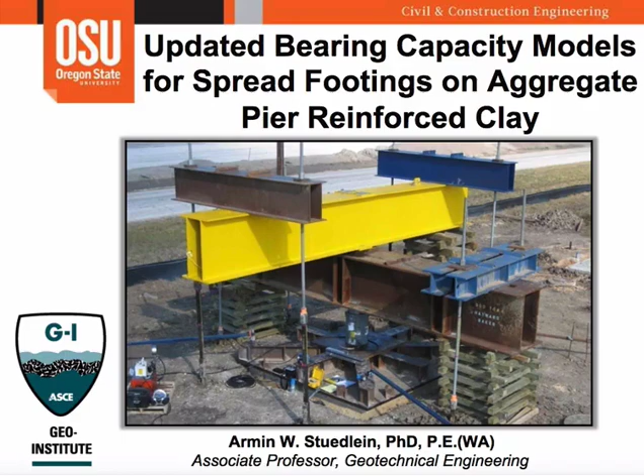Thank you, Sadiq. It looks like my slides have come up, so I'm going to go ahead and get started here. Just want to thank the technical committee for agreeing to host this presentation. Essentially, I'll provide a short introduction and background for the work, and then get into the main portion of the presentation to indicate the experimental basis for the models that we've proposed.

Then we'll take a step back into the theoretical considerations for bearing capacity of aggregate pier improved ground and discuss the accuracy of previous bearing capacity models, and then begin to step through the various models we've developed using the existing database and some new loading test data that we've developed since then.

So for those of you who might not be relatively familiar with aggregate piers or stone columns, I'll give a quick background. We're only going to talk about the action of these ground improvements in plastic soils. In my experience, for plastic soils, whether we use a stone column or aggregate pier or call it a granular pile, they all seem to behave the same way. They follow the same mechanics.

This ground improvement alternative usually provides a cost-effective alternative instead of full excavation and replacement, and in some cases, deep foundations. Furthermore, it can provide a sustainable alternative to other construction approaches in that it reduces the excavation material volume, the duration of excavation, reduced material quantities, and you can also take advantage of using recycled aggregates in their construction. There are several types of aggregate piers, essentially classified on how they're constructed.

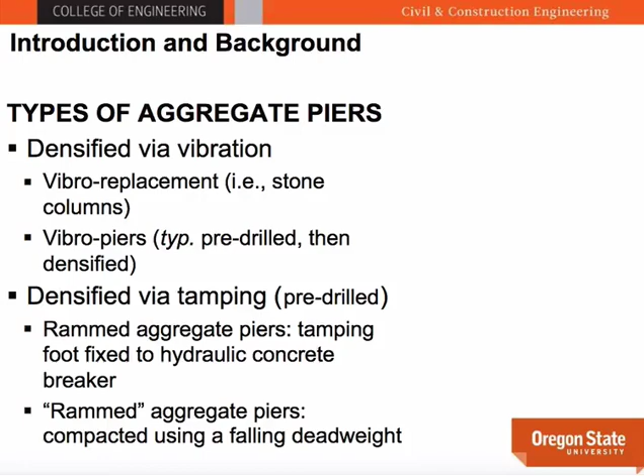I think the first kind of aggregate pier, or really a stone column, was produced starting in the 1930s in Germany, by vibro replacement. Here the vibrator is used with a tremie pipe in a bottom feed method to construct the stone column or aggregate pier. But we can also construct a vibro pier, the general term, where first a cavity is pre-drilled using soil augers, as shown in this photo. Then stone is placed from the top feed approach, and the material is then compacted via vibration.

Quite common and popular are aggregate piers that are densified via tamping. Here we've got essentially an excavator that has a hydraulic concrete breaker with a tamping foot, and the concrete breaker delivers short energy pulses to the tamping foot to compact the aggregate.

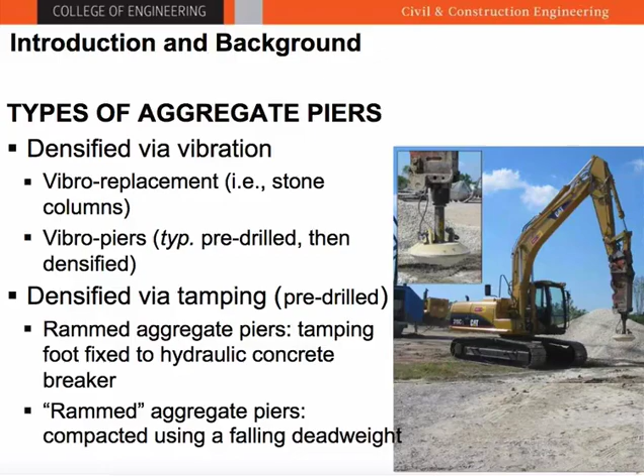Now, these are really not new types of construction. For example, the Taj Mahal was built in the 1700s, or even maybe the 1600s, using what we would call rammed aggregate piers, constructed using a free-falling dead weight, and that's still used in some parts of the world where labor is cheaper.

So if we think about how we can apply ground improvement of aggregate pier type to spread footings, there are essentially four major configurations here. I apologize, it looks like there's a plotting issue on my slide, but essentially you've got a single pier, given by caption A in the schematic, where the footing footprint and the stone column have the same diameter.

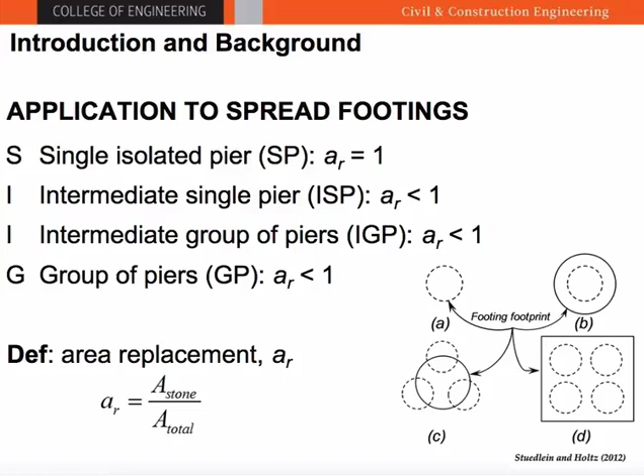In this situation, the area replacement ratio is 100%. Captions B and C show cases of intermediate groups of piers or single piers where the footing footprint may encapsulate all or part of the stone column as well as part of the surrounding soil. And then the more typical production condition is a group of piers where the footing footprint is much larger than the area of stone. Typically in production, you'll see area replacement ratios for static support ranging from maybe 15 to 40%, depending on the loading conditions.

So let me give you a quick background on the experimental basis for the bearing capacity models that we'll be talking about. This largely stemmed from my doctoral work at the University of Washington. Around 2006 or so, we performed an extensive literature review and found 47 loading tests reported in the literature of shallow foundations on aggregate piers in plastic soils. About a third of those were of good enough quality that we considered them for the development of bearing capacity models. But clearly 15 loading tests is not sufficient to evaluate the accuracy of existing models or develop new ones.

So we performed rather extensive full-scale loading tests of 20 full-scale footings. These included 12 single-element tests, or single-pier tests. Five tests were on groups of piers with a 9-foot by 9-foot square footing, and the remaining 3 tests were done on an unimproved subgrade using both the large and the small footings. At this test site, which was in Baytown, Texas, the subsurface conditions were your typical Beaumont clay, which is medium stiff in the near surface, grading to stiff as you go a bit deeper.

Our test site is shown on the figure here on the left, indicating the distribution of each individual loading test, as well as the explorations conducted to inform the model of the subsurface. Single-element tests were conducted with a 2-beam system with 3 reaction points to transfer the uplift loads to helical anchors. The larger footing loading tests were conducted using a 6-beam reaction set with 8 anchors to generate sufficient resistance to push the footings down.

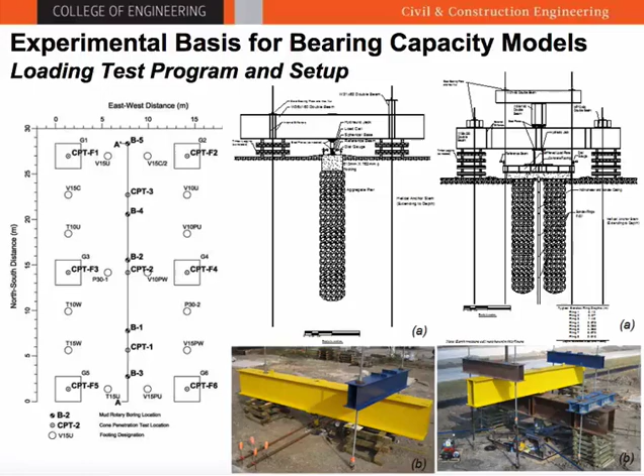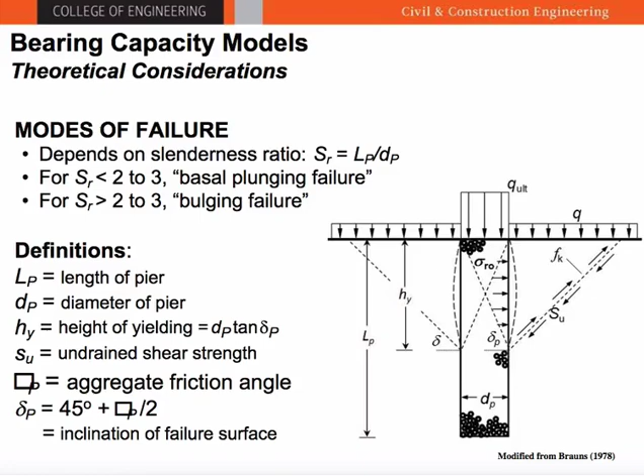Another approach, suggested by Mitchell in 1981, is to boil down the problem to a simpler empirical approach, which we call the simplified method, in which a single aggregate pier bearing capacity factor is multiplied by the undrained shear strength to develop the capacity.

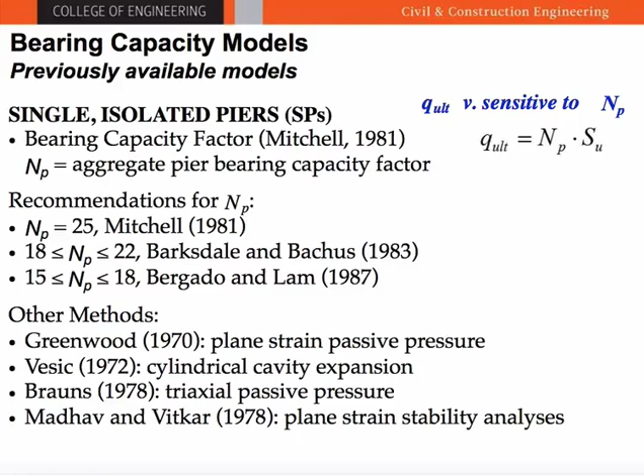Now, there are several other methods in the literature, we just don't have time to review those here.

With our load test database, which included 30 different high-quality load tests, we're able to evaluate the capacity of single isolated piers by comparing the bias, defined as the observed capacity divided by the predicted capacity, and then the variation in the bias, which we measure using the coefficient of variation, the standard deviation divided by the mean.

The table shows that the bias on average could vary greatly, from an underprediction of 250% with a variation of 30%, to an overprediction on the order of 50% with the Brauns method, which has a bias of 0.64 and also produces significant variability in accuracy.

The simplified method by Mitchell could achieve an average accurate bias of 1.01, meaning on average a perfect prediction, but you see that the COV is still quite large at about 25%. That just happens to be the value for our database, so there's not a lot of predictive power moving forward.

So we thought we could improve upon these models by using a semi-empirical adjustment of the theory. We back-calculated key bearing capacity factors for the cavity expansion model and the simplified model, and found that there's a significant influence of the undrained shear strength. That's really not a surprise, because the triaxial passive pressure in a plastic soil under undrained conditions is controlled by the undrained shear strength of that material.

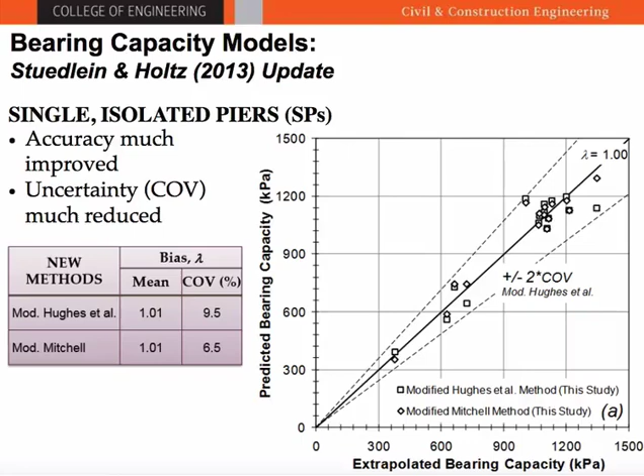If we compare the bearing capacity extrapolated from each of the loading tests to that predicted using these two new models, we're able to see that we're quite accurate on average, and we've reduced the coefficient of variation to under 10% across the board. At the time, we were pretty happy with these semi-empirical bearing capacity models.

So these are for single isolated piers. What about groups of piers or intermediate pier conditions? What we did is invoke the unit cell assumption, treating each aggregate pier below the footing as having some tributary area that controls its response.

It's quite common in terms of settlement analyses with aggregate piers to use this unit cell assumption, where we essentially factor the stress distributed to the pier by its area replacement ratio, and then we add in the stress transfer to the soil by 1 minus the area replacement ratio.

And so we adapted this approach for settlement calculations to capacity, where we would factor each calculated capacity, for example, the capacity of a single pier, by its area replacement ratio, and then add in the factored capacity of the soil if there hadn't been an aggregate pier in place. This simplified approach was found to produce an improvement over the other methods that were available for groups of piers.

Now, note, I'm not discussing the other bearing capacity models for groups of piers, but we did compute their accuracy statistics, and the bias was found to be highly variable with a COV of about 40%. That's really not good. If we discount the intermediate single piers, the bias is pretty close to 1 and a COV of about 13 to 15%. Including the intermediate single pier geometry, the bias is a little bit high with a general underprediction of about 10% and a COV of about 30%.

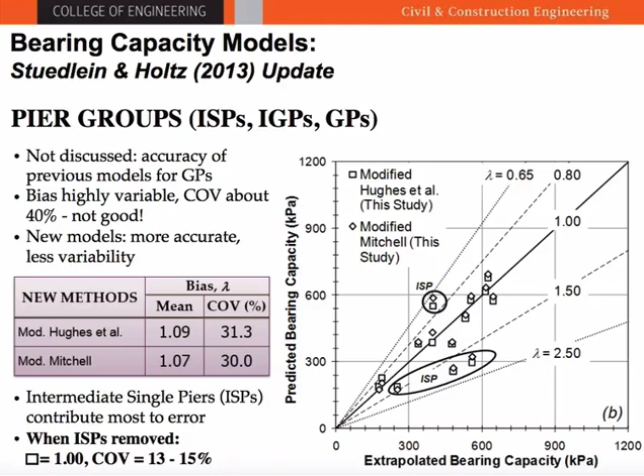But since this was published in 2013, we've recently completed a new load test program, and with our 8 new load tests, we're able to further update our bearing capacity models. In the previous models, we really didn't account for slenderness ratio directly, and we only indirectly accounted for confinement of a single pier below a footing in a group pier configuration. And this led to the poor accuracy for some of the pier cases, like the intermediate single piers, the intermediate groups of piers, and the group of piers. So we thought we would take a new look at the bearing capacity models, to be informed by the new data and see if we can account for some of these known variables a little bit better.

If we look at this little schematic in the upper right-hand side, we now want to account for the confinement produced by the soil surrounding the pier. We're not necessarily talking about the stress per se directly, but rather the volume of soil that is confined below the footing, and account for the extent of confined soil to better improve the capacity. So we back calculated the capacity of a given pier below the footing as it lies within the group, quite a bit different from the single pier capacity discussed earlier, and we can back calculate it using the same general approach that was proposed in 2013.

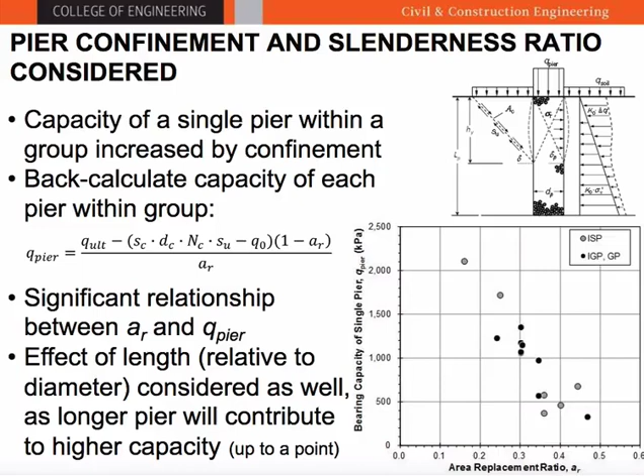And what we see is that there's a significant relationship between the capacity of a single pier in any group as a function of the area replacement ratio. You can see that the capacity of that pier really depends on the volume of confined soil surrounding it, and that explains the negative relationship between the capacity of that single pier and the area replacement ratio. There is some scatter here, and that has to do with the effect of slenderness ratio, and so we'll get into that shortly.

So we propose new models which are not being shown nicely on my slides. I hope they're being shown nicely on your slides. That includes the confinement effect. Each of these new models has two components. One is the capacity of a single pier, again factored by the area replacement ratio, and then the capacity of the unimproved soil, which is also factored by 1 minus the area replacement ratio.

The new item here is that, number one, we've recalibrated the N sub P and the K sub P factors, which are the bearing capacity factor and cylindrical cavity expansion factor, but we've also added this confinement factor, which is a function of the area replacement ratio. The newer capacity factors now include both undrained shear strength and slenderness in their general terms. So if we go to the next slide, we can show the actual formulations for these new factors.

If these slides are not available after the talk, you can always email me for a copy of these slides. But here we can see the new formulations for N sub P, accounting for slenderness, and then here's the back-calculated empirical confinement effect factor. Regardless of what model you use, either the simplified model or the cavity expansion model, the confinement factor is the same because the effect of confinement is the same on the aggregate pier. So we want it to be philosophically consistent.

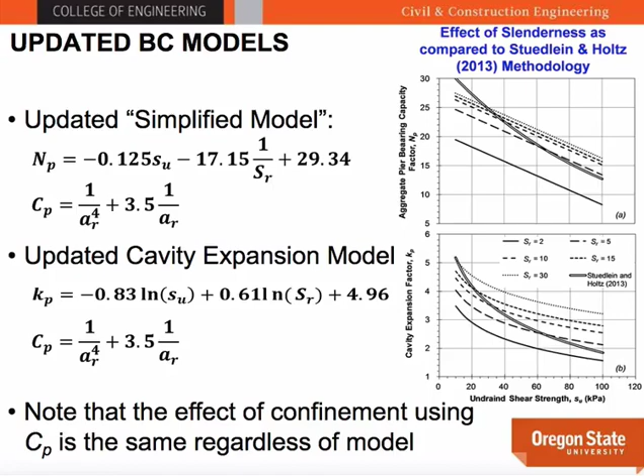If you've got a short stubby pier with a slenderness ratio of 2, going from a slenderness ratio of 2 to 5 shows a big change. But as you get longer, that change diminishes, because once the shaft has sufficient length to force the bulging failure mechanism, there's only a small incremental improvement in capacity. We're able to capture that.

Wrapping up, the accuracy of these updated models has improved relative to the previous model set, with a bias on average of 1.0 and a coefficient of variation all less than 20%, depending on the design configuration. We now feel like we're capturing the mechanics governing the capacity of aggregate piers quite a bit better, and we're able to make an improved prediction of performance under shallow foundations.

To wrap up, I think we've been able to continue improving the modeling of the capacity of these systems. While we use theory as our starting point and always want to keep an eye on the mechanics, I think using full-scale loading tests to account for observed performance and the collective experience of the industry is a good way to go. These loading tests continue to play an important role in improving our models.

But that doesn't mean we don't need to perform site-specific loading tests to confirm performance. Those are always recommended from a quality control standpoint, and they also help provide data for further improvements.

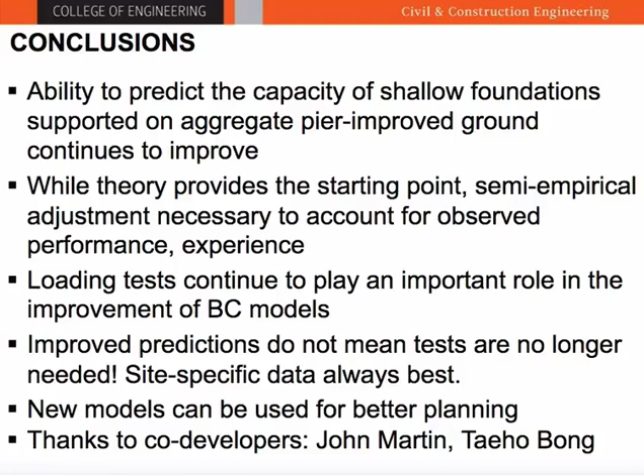Good afternoon, everyone. My name is Xiong Zhang, from Missouri University of Science and Technology. Today's presentation is part of my doctoral work when I was a PhD student with Professor Jean-Louis Briaud at Texas A&M University. The topic of my presentation is modeling residential buildings on expansive soils in response to climatic conditions.

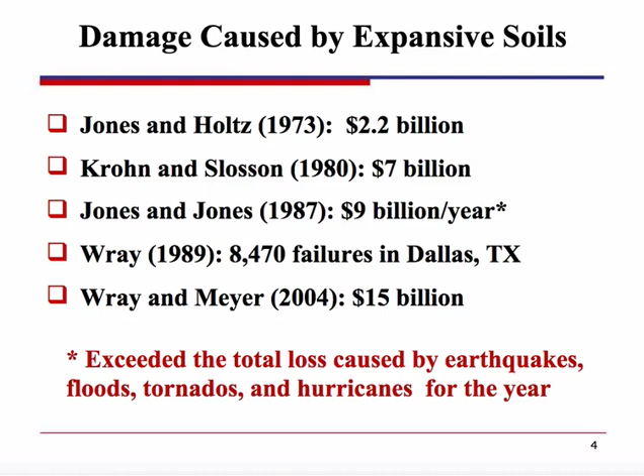The problem with expansive soil is that when it gets water, it swells, and when it loses water, it shrinks. So when you build a residential building on expansive soil, normally the soil underneath the center will have a relatively constant moisture content, but the soil at the edge of the house will change significantly in moisture content, causing volume change of the soil and differential settlements below the foundations. If the differential settlements are significant enough, it will cause damage to the house.

So here are some examples of the damage caused by expansive soils. This is related to a tree, which can absorb a lot of water and then cause damage due to expansive soil.

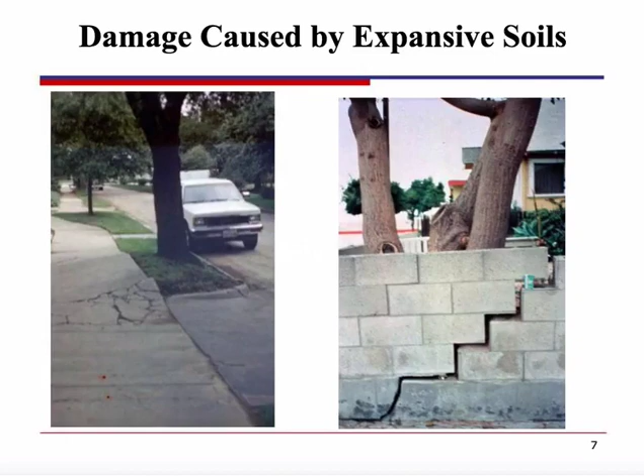So normally we have some kind of foundation design to try to overcome these problems. The most frequently used are the stiffened slab on grade or elevated structure slab on piers. For this simulation, we are mainly focused on the stiffened slab on grade.

So a little background about existing research, because the problem is very complicated. In the past, normally we divide the problem into several small problems. We often use a two-step approach.

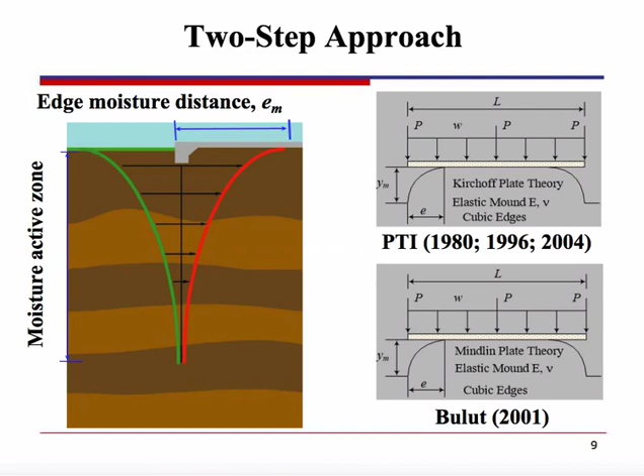In the first step, we do a single one-dimensional or two-dimensional numerical simulation to simulate the moisture content variation in the soil below the slab, and from there we can calculate the differential settlements caused by the coverage. Then in the second step, we apply a plate and force it to fully contact with the deformed soil to calculate the bending moments and the shear stress in the slab for design purposes.

In the first step, many simulations are just one or two-dimensional. It cannot consider the coupling between water flow and deformation, and the climatic effects are not accurately considered. In the meantime, very often constant material properties are used for soils.

In the second step, very often soil is considered as solid without water inside, and we use either Winkler foundation or elastic half-space foundation models to simulate the soil structure interaction. I will talk about the limitations of these kinds of models later. Also, it can neither simulate the separation nor the friction behavior between the soil and the slab.

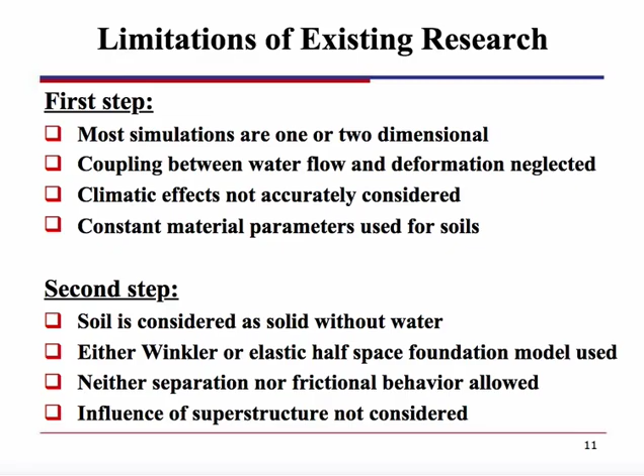In addition, according to our knowledge, there is no existing research that considers the influence of the superstructure. In other words, the major limitation of the existing research is that the soil, the slab, the superstructure, the soil structure interaction, and the climatic condition have never been simulated in a single whole system for the foundation on expansive soil.

So for this research, we are trying to overcome the limitations in the existing research and try to simulate all these components in one single simulation. Let us take a look at what we need to include in the simulations.

First, we need a model which can simulate the behavior of expansive soil. Expansive soil can deform under the influence of both mechanical stress and moisture content variation. As a result, we need a coupled hydromechanical stress analysis to simulate the behavior of the soil.

In addition, we need a model which can quantify the influence of climatic conditions. So we need to know how much water is going into the soil due to rainfall infiltration, and how much water is lost due to evaporation or evapotranspiration. So we need a model which can be used to define the boundary condition using daily climatic conditions.

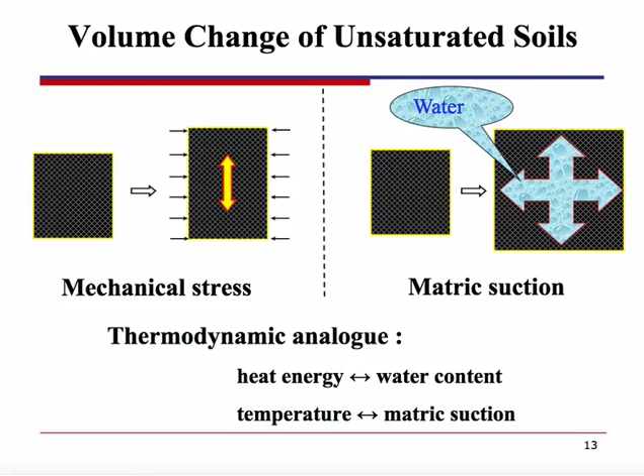And the fourth equation is the mass conservation for flow in unsaturated soils. I would like to emphasize that these equations can be used for both saturated and unsaturated soils. For saturated soils, there is a relationship between the material properties, and the above four equations become a Biot consolidation equation for saturated soils.

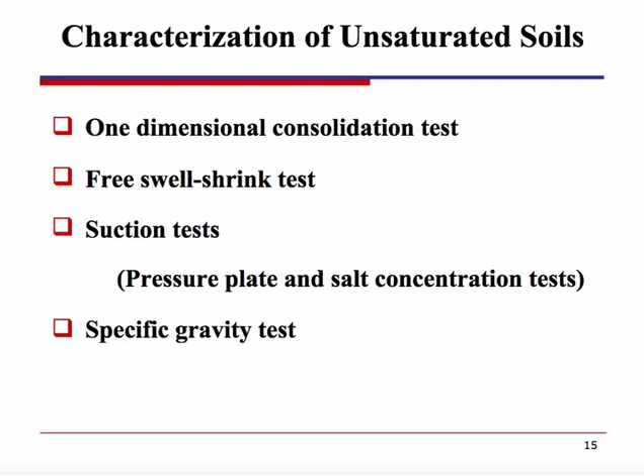And from this test, we can generate two constitutive surfaces for unsaturated soils. One is for the volume change, represented by void ratio as a function of matric suction and mechanical stress. The other is the relationship between water content and mechanical stress and matric suction.

By taking the partial derivative of these two constitutive surfaces, actually we can get the material properties needed for the simulations, which include the Young's modulus, the coefficient of expansion due to matric suction change, and the specific water generation coefficient. This parameter will tell you, if you apply load to the soil, how much water can be squeezed out of the soil. And the last one is the specific water capacity, which is the slope of the soil water characteristic curve. But as you can see, the soil properties are highly nonlinear, and all of them are functions of both mechanical stress and matric suction, which makes the problem highly nonlinear.

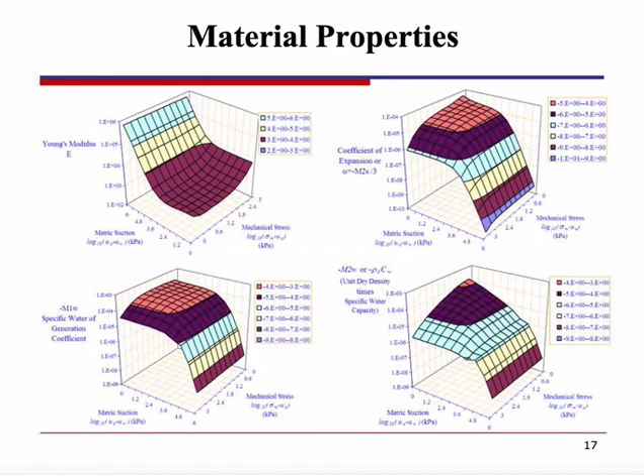The next problem is how to deal with the boundary condition. The boundary condition includes two parts. One is the rainfall infiltration, which is relatively easy to handle. The difficult part is the evaporation process. Many factors influence the evaporation process, which include the solar radiation and air temperature. These two will provide the energy which can change the liquid water into water vapor. And then the relative humidity and the wind speed will have influence on the speed of how water vapor is removed from the ground soil surface. Water vaporization and vapor removal are two important processes in the evaporation process.

Other factors also influence the results of the evaporation or evapotranspiration process, which are vegetation types, soil permeability, and soil water content. For example, a tree has a different ability in absorbing water from the soil than grass. And if initially the soil is dry, even if it is a very hot day, the actual evapotranspiration will be zero.

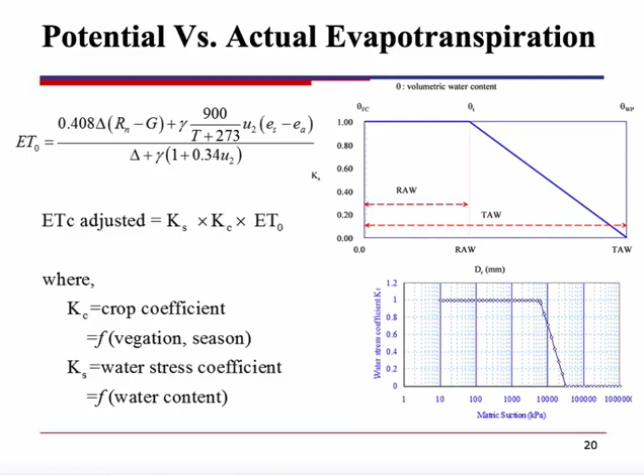So this slide shows the equation used for the Penman method. As you can see, Rn is solar radiation, T is the temperature, U2 is the wind speed, and es and ea are related to relative humidity. In addition, there are some correction coefficients which can consider the influence of different kinds of vegetation and different water content situations. And for different kinds of boundary conditions, such as bare soils, grass root zones, and tree root zones, we also have different methods to consider their influence. For example, for a tree, we consider that most of the rainfall is intercepted by the tree, so that no infiltration can happen in a tree root zone. But this is just a first approximation.

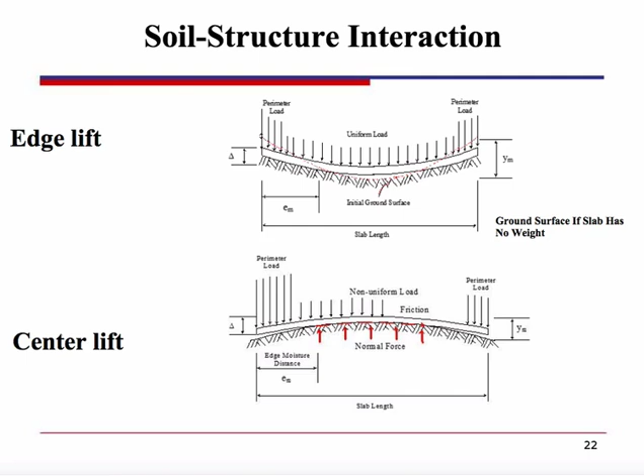And then we also need a model which can simulate the soil structure interaction. So this slide shows two situations. One is the edge heave case, which corresponds to the situation during a rainy season when there is a lot of rainfall infiltration and there is a swelling of the soil at the edge of a slab. And the second case is the center heave case, which corresponds to the situation in a very hot season, and there is a lot of water loss from the soil at the edge of the slab. So as you can see, the load from the superstructure could be not uniform. Sometimes the slab and the soil can be separated, and there could be some kind of frictional force between the soil and the slab. All of this should be considered in a simulation.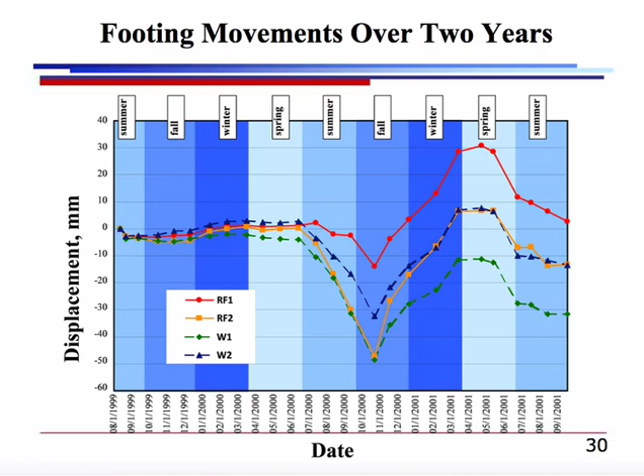Our simulation does not match the measurements perfectly, but it reasonably reflects the tendency of the 4 footings. The small movements in the first year were because the rainfall and evapotranspiration were relatively evenly distributed, resulting in little moisture movement for the soil.

I would like to mention that for our simulation, we have a simulation every day, but for the measurements, it's monthly. This is the reason you can see some of the differences between the simulation and the measurements.

Then we have a very dry summer without even one drop of rain. This was the reason why there is a big drop. It was followed by a very rainy fall season, which was the reason why the 4 footings went back up.

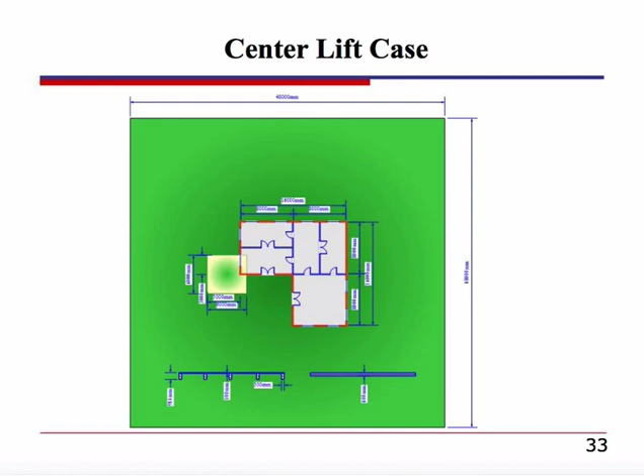This slide shows the distribution and the dimension of the simulation. So this is the layout of the simulation. We have doors, windows, a car garage, and a tree. For the stiffened slab, we use an equivalent uniform slab to represent it.

So this one shows the opening between the soil and the slab. As you can see, at the corner, there's actually an opening between the soil and the slab.

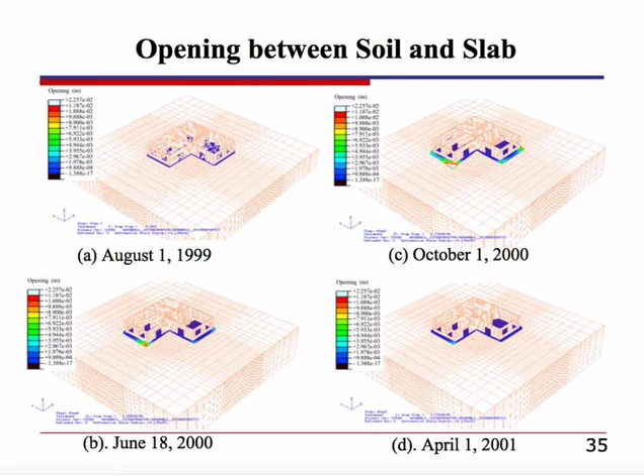This is where the tree is located, because the tree has a high ability to absorb water, which causes a large separation between the soil and the slab, but it can recover in response to the climatic condition.

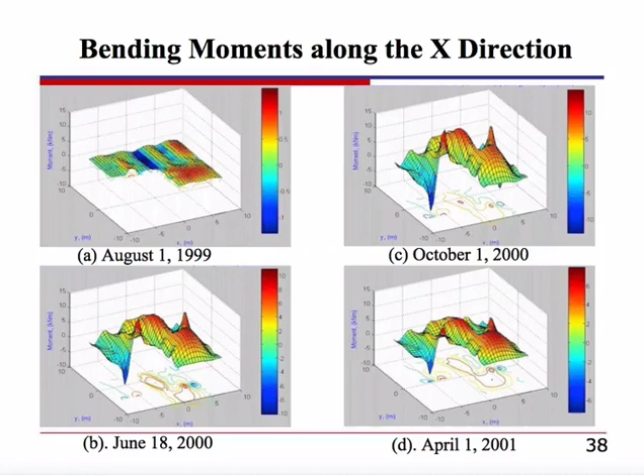This is the bending moment along the X direction at different locations of the slab. For design purposes, we can find the maximum and minimum bending moment in the slab for a period of 2 years, and we can also find the stress in the superstructure, for example at the corner of the door and the corner of the windows.

So these are the conclusions. We developed a complete system for the simulation of residential buildings on expansive soils, which overcomes many limitations of existing research.

We use different kinds of methods to deal with different kinds of boundary conditions, and different methods to predict the different components with the best accuracy. We found that the tree has great influence on the behavior of the building, and we think we need to provide some modification for the existing design criteria.

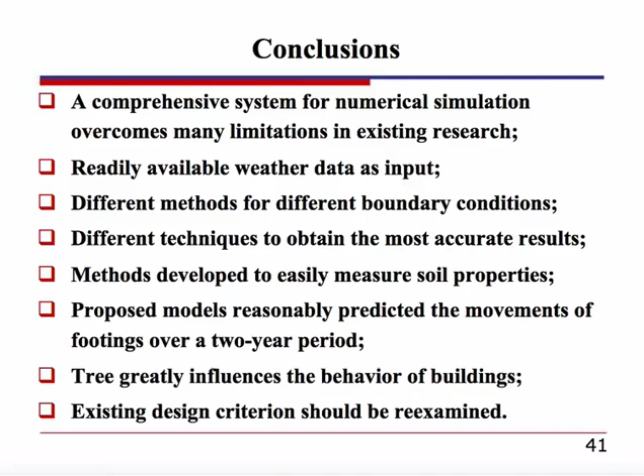Our third presenter is Mr. Lyle Simonton. Lyle is the Director of Business Development in Subsurface Constructors, Inc., and he is going to present on implementation of ground improvement and earth retention for the Streets of St. Charles Development. Lyle, you are on.

Thank you, Sadiq, and thanks to the technical committee for allowing this presentation today, and thanks for everybody attending the presentation, the title of which is Implementation of Ground Improvement and Earth Retention for the Streets of St. Charles. Now, the title is slightly misleading in that although earth retention was a big component of this project, time won't allow us to really talk about it too much, but it does play a role even in the ground improvement part of the design and construction on this project. So you will see some slides of the earth retention, and I'll touch on it, but probably not give it its due time, considering this is a shallow foundations webinar.

Just to introduce the project, this is more of a case study than the prior presentations you've seen today. I think Jean-Louis has a case study on the Washington Monument, so I guess this is the case study half of the webinar. And you'll see some similarities in the discussion today on what Dr. Stuedlein presented with aggregate pier design.

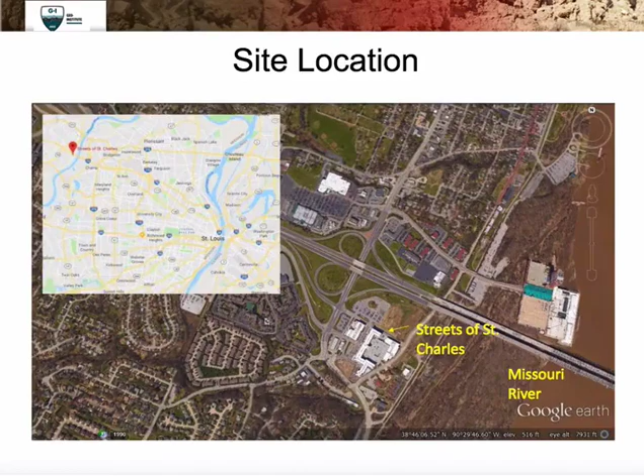So as you can imagine, we have some alluvial soils here due to the proximity of the river, but in this particular photo from right to left, you have a pretty substantial grade change, which I'll point out on the boring location plan. So description of the structures, again, this is the completed project, and you'll see this photo a couple times throughout.

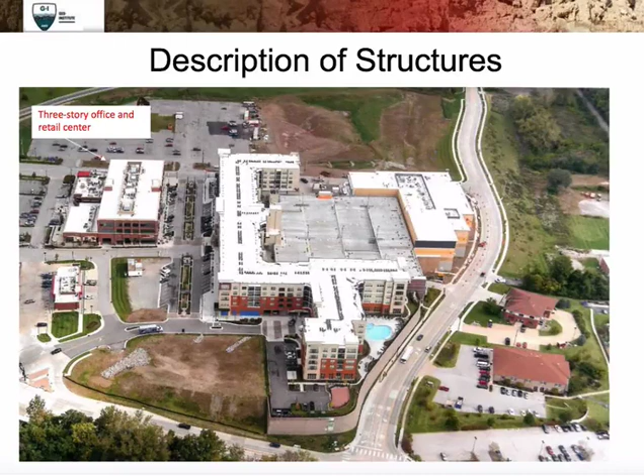First and foremost, we have a 3-story office complex, a fairly straightforward stone column project here, but I'll get into a little bit of the details of that building. Next, we have the 1,250 space parking structure. As you can see here, the apartment building stretches around 3 sides of that parking structure.

And so the parking structure was built inside of a permanent shoring system that we built, and the apartment building and the office building to the left were constructed at a higher grade. Now, lastly, we did a movie theater as well, and so basically all 4 sides of the parking garage have structures surrounding, and all of those structures, the office building, the apartment, the parking garage, and the theater, all required ground improvement, stone column ground improvement, or in one case, grouted columns.

At the bottom of the slide, you'll also see that large MSE wall. The overhead shot doesn't do it a lot of justice in terms of its size and scale. To the top of the picture would be north, and just for orientation, the Missouri River would run north and south just to the right of your photo here.

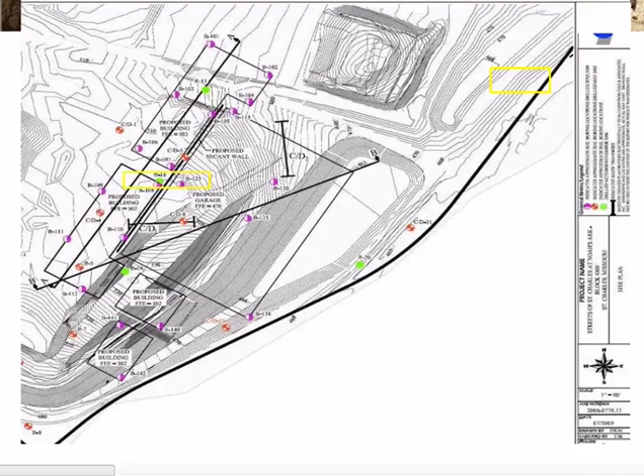I'll call your attention to line BB, which is the profile line that I selected for this presentation, more than anything to show the grade change across the site and how the soil conditions changed accordingly with that grade change. So here's a profile. Left to right, the Missouri River would be off the page to the left, so you're grading up to the higher elevations. Finished floor elevation for that 3-story office building was about 502, and about 32 feet below that was the finished floor elevation for the parking garage.

So as I mentioned earlier, and hopefully you can see some of the blow counts and the types of soils here. Again, this is just one soil profile. But what I want to point out here is that on top of the bluff, if you will, to the right and the higher elevations, you see the cohesive material. And it's pretty good cohesive material. I mean, you can get some pretty high bearing pressures out of this, and you see blow counts in the range of 8 to 15 or so, and in some cases even a little bit higher than that.

So you're talking about medium stiff to stiff clays, and you might be wondering, why would you need ground improvement in that soil? Well, the reason why on that particular building they required 8,000 pounds per square foot. So you're not going to get that out of that clay, and therein lies the need for stone column ground improvement.

As you move from the high side down to the low side and more towards into the floodplain part, you'll see that the soils change to more sands and silty sands. And I know we show mostly sand in this particular profile, but the sand, I don't know off the top of my head a percentage of silt, but there were some fines in there. It was not necessarily clean sand. And even those blow counts were pretty good, but again, that parking garage structure also required 8,000 pounds per square foot. So it's because of the different soil types across this site, well, at least one reason why we had to differ our installation techniques 2 or 3 different times. Just about every way you can install a stone column, we had to do that on this particular site.

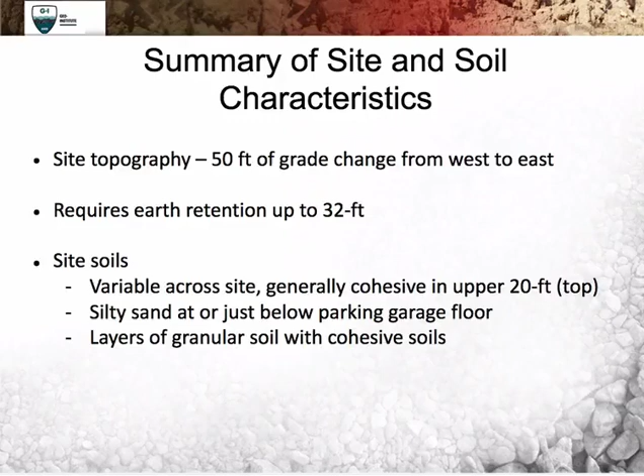As I mentioned, the site soil is variable across the site, pretty good materials, but generally cohesive in the upper 20 feet. So we use one technique for stone column installation in the upper soils, and then change that technique in the lower soils and the parking garage elevation. And again, all structures on this site require stone column ground improvement to achieve a structure that can be built on spread footings as opposed to deep foundations.

If you're not familiar with vibro ground improvement, vibro stone columns, again, Dr. Stuedlein touched on this. Here's some photos and an illustration on the right of a typical tool used for the installation of vibro stone columns. The illustration on the right shows the guts of the tool, which is an eccentric weight that rotates around an axis that provides a really high-frequency vibratory energy. These can be powered either hydraulically or electrically.

Ours are hydraulic in nature, and the middle photo shows a typical setup of that, and we can either pre-drill a hole to advance that tool or just push it into the ground. The photo on the left looks a little bit more robust, and it's not necessarily more robust, but the difference is that it's set up for what we call a bottom feed installation. There's a steel tube tremie that's welded to the tool, an open hole at the bottom for trimming rock to the bottom, which we would use in a collapsible type of soil. And I'll go into that in a little bit more detail.

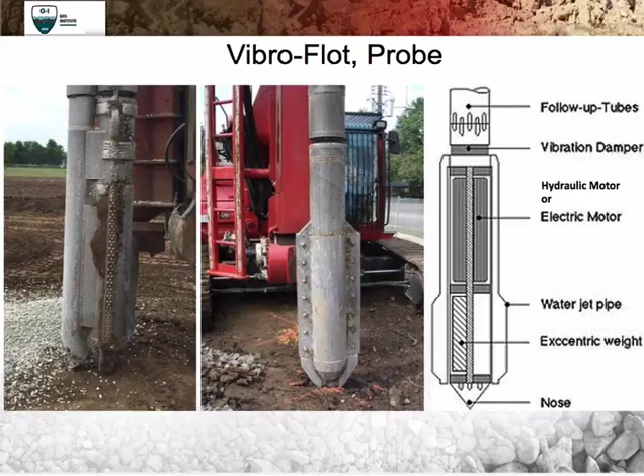So I know Dr. Stuedlein talked a lot about design. I want to touch on it a little bit here. Got ahead of myself again. Figure out the animations. And we're looking at some different principles here depending on the soil type. With aggregate pier ground improvement in cohesive soils, you're looking predominantly at a reinforcement mechanism, reinforcing those cohesive soils, not necessarily an extensive amount of improvement in those cohesive soils.

Alternatively, in granular soils, with the high-frequency vibratory energy, we're going to densify the granular soils. As you get into kind of the in-between of those, maybe silty sands, again, a high percentage of silt in sandy soil is going to be more of a reinforcement mechanism than densification. There becomes a limit at what we can densify as your fines content increases.

So the primary reason for using stone column ground improvement more often than not is to support a uniform increased bearing pressure. And I show here a typical range of bearing pressures, which we often see 5 to 6 or 4 to 6 KSF as a requirement for spread footings and using ground improvement. In this particular project, we went considerably higher than that with 8 KSF on all the structures, but we were able to do so because we were starting out with some pretty good soils.

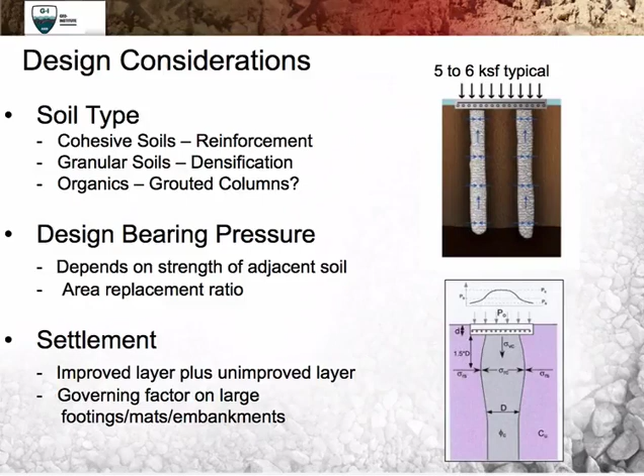I don't think settlement necessarily governed. We didn't have any really large footings. We were trying to get that higher bearing pressure on this particular project.

Here's an illustration of dry top feed. We advance that tool into the ground, take the tool out, or pre-drill the hole depending on the soil strength, dump in the lifts of stone from the ground surface, and compact them accordingly.

However, if we're in a more collapsible soil, we can bottom feed the stone. This is what we call a dry bottom feed, so there's no water flush through the end of the tool, but we're concerned with hole collapse in this case, so we won't take the tool out of the hole until the stone column is complete.

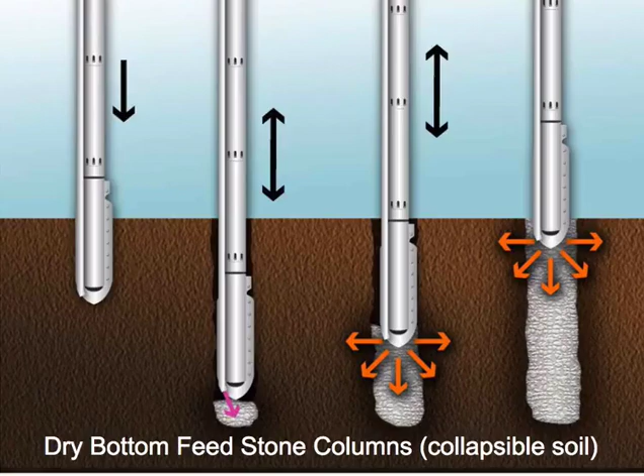On the Streets of St. Charles project, we did use this technique. However, it wasn't because of soft soil. It was more of a load transfer condition that I'll show on another slide.

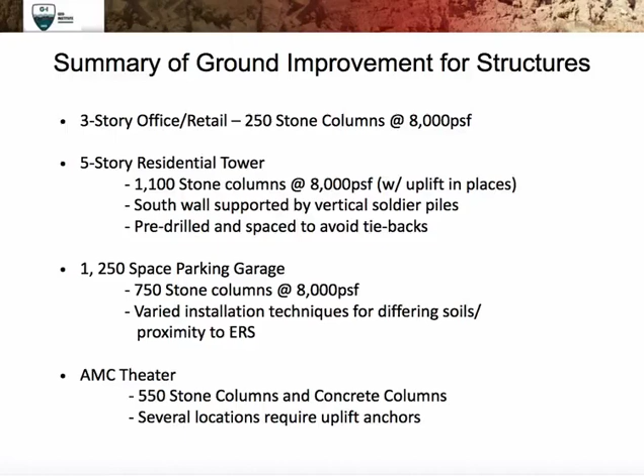So just to summarize the ground improvement on this particular project: we had a 3-story office building, as I mentioned, at 8,000 pounds per square foot. All of them had 8,000 pounds per square foot. There was a 5-story residential tower surrounding the earth retention system, a parking garage installed at a lower elevation in sands, and the movie theater, which used both stone columns and concrete column ground improvement.

I'm not going to go into a lot of detail on the earth retention system, but in terms of the sequence of construction, you see the completed office building towards the top of the photo. The three sides of earth retention here, again about 32 feet of cut there. One thing I'll point out is you can see white dots along at least two and a third sides of the earth retention system - those are completed stone columns that needed to be field located and installed to miss the tiebacks of the earth retention system. So that's just one of the many challenges on this site with an earth retention system and stone column construction on top and bottom of it.

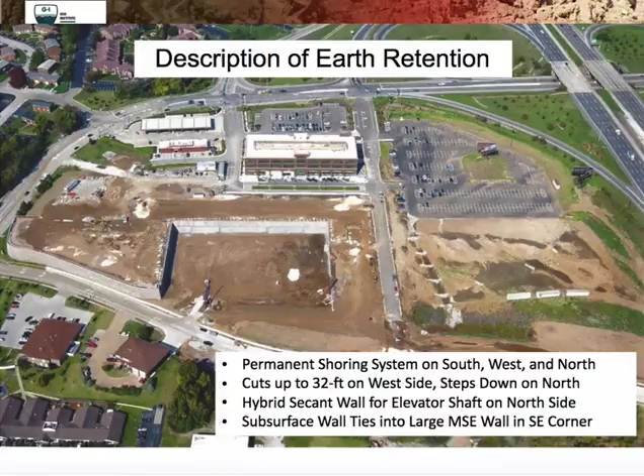Just a picture of some stone column installation. This is a permanent shoring system.

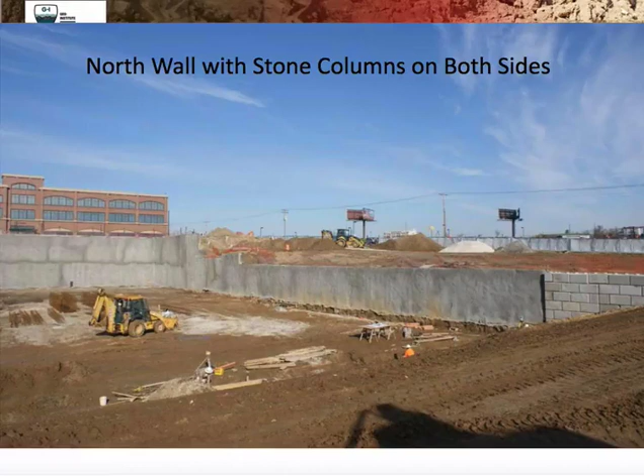I want to call your attention to this side of the wall, the permanent shoring wall, and point out that we had stone columns for the parking garage in the lower elevation and stone columns required for the movie theater just adjacent to and behind that wall. Some challenges presented there that I'll get into.

Here you see a different view of that bottom feed installation where one hopper feeds the other hopper, and that goes into a tremie to allow for lifts of stone to be placed in the hole without taking the vibro probe out of the hole.

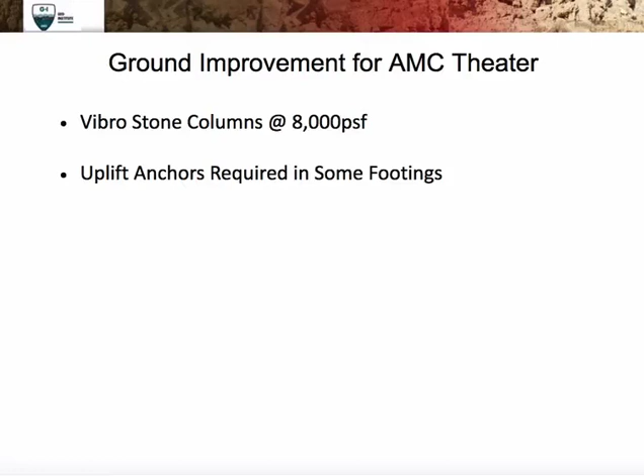So moving on to the theater - as I mentioned, all structures were designed for 8,000 PSF. This particular structure did require some uplift anchors. The uplift anchors we installed here consisted of a single bar grouted in concrete and tied into the footings.

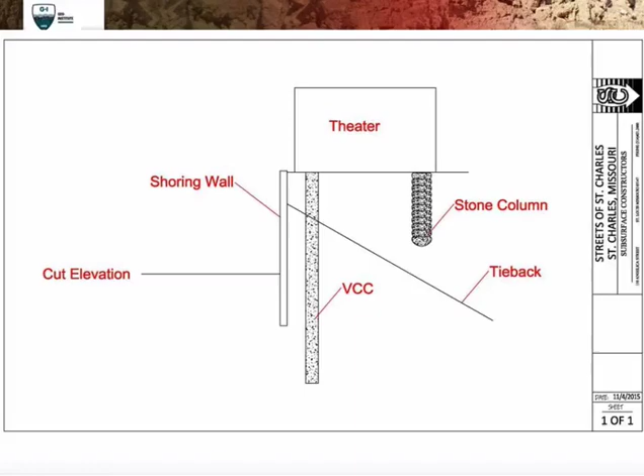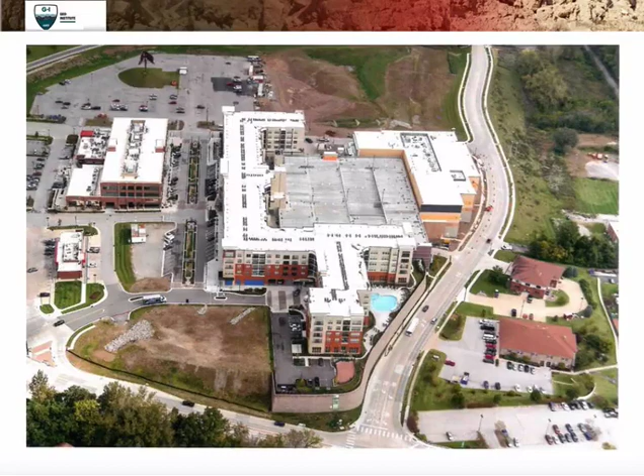And here you see another shot pretty much of the finished product, or finished project. All structures in place, a very nice mixed-use project where we're able to use several different types of ground improvement installation.

I do have one question here. Were any of the stone columns designed to carry shear or uplift loads? That might have been placed before I mentioned the uplift on the theater. I didn't point it out in the foundation plan, but several of those column locations did require uplift, in which case we used the grouted column.

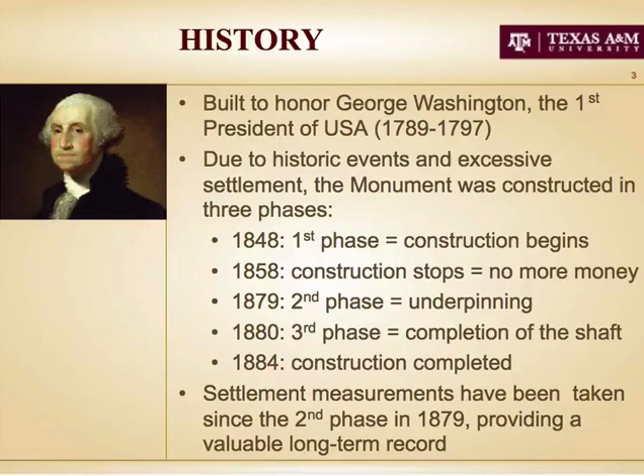In 1858, construction stopped because they had run out of money, but they were not finished with the project. Then Civil War took place. Back to the construction in 1879, and the settlement had been so large that underpinning was selected. And then the completion of the shaft took place and finished in 1884. So the settlement was measured during the second phase, starting in 1879, providing valuable long-term settlement record.

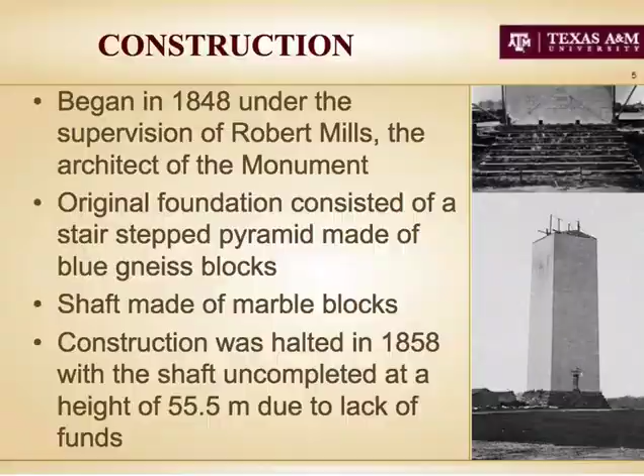The construction did not resume until 1879 after the Civil War, and Lieutenant Colonel Casey of the U.S. Army Corps of Engineers took control. And Casey was a very bright fellow. He realized that although there was no settlement measurement, the early part of the structure had settled dramatically, and he could not finish the job, or we probably would have today the Leaning Monument of Washington. The original foundation was considered inadequate, and Casey decided to increase the foundation area and to found the monument on a stiffer soil. Again, the completion of the monument goes to 1884.

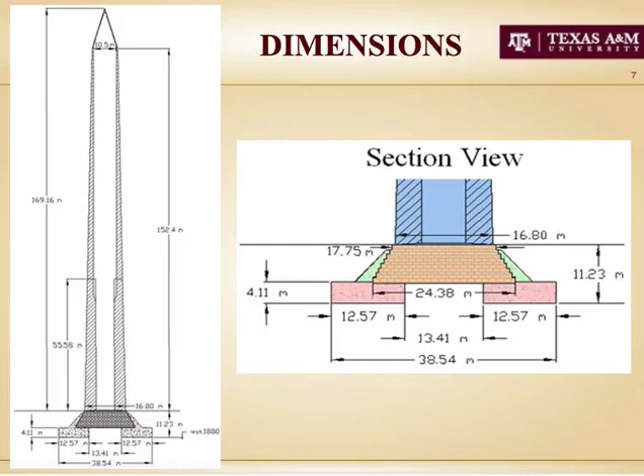So that alone created some settlement, and Casey must have been a bit worried when he saw that his repair technique was actually creating additional settlement. Nevertheless, he was able to complete the monument, and at the end it was about 600 meganewton, or about 60,000 tons.

However, the important point is that if we now look at the pressure, so on the vertical axis, instead of load, now you have pressure as a function of time. The pressure reached over 500 kilopascal, or about 5 tons per square foot, at the end of the first phase of construction, but due to the underpinning and enlargement of the foundation, while the weight of the structure increased significantly, the pressure decreased according to the area. And so by the completion of the monument, the pressure was around 460 kPa.

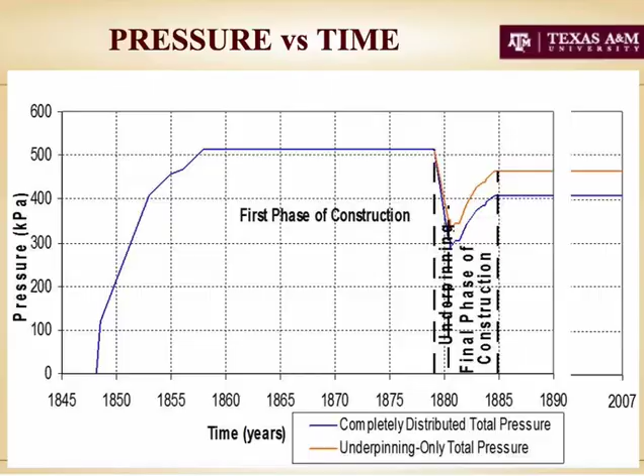Casey realized that he could not afford more pressure under the monument and that enlargement of the foundation needed to reduce the pressure even though the weight would actually increase. So if we now look at the weight of the original foundation, about 7,000 tons, the weight at the end of phase 1, 30,000 tons, the weight of the new foundation, 15,000 tons, the weight of the Washington Monument completed, 600 meganewton or 60,000 tons. By comparison, the San Jacinto Monument in Houston is about half that weight. The Tower of Pisa is about 1/4, and the Eiffel Tower less than 1/6.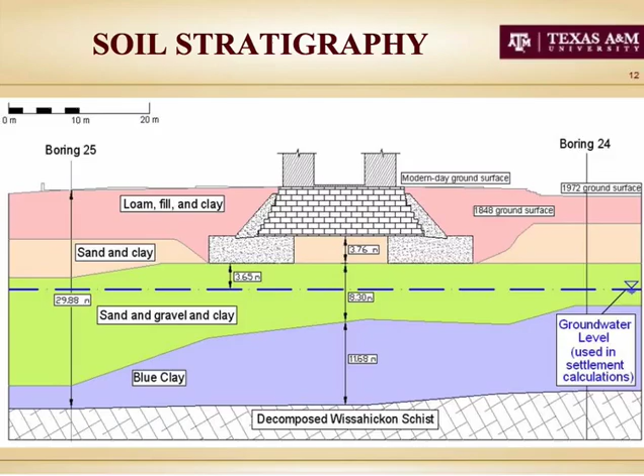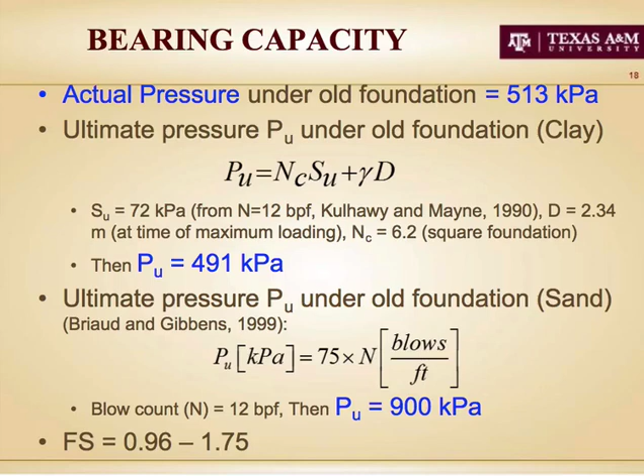So obviously, during the first phase, this structure was very close to failure, and you will see that the settlement calculations concur with this particular evaluation.

Now, this was the bearing capacity before the underpinning, and bearing capacity after underpinning. So now we're at the deeper elevation on top of the green layer.

And if you redo the calculations of ultimate bearing capacity, remember the actual pressure at the end of construction had decreased because Casey decided to underpin and enlarge the foundation. So even though the load increased, the pressure had decreased to 465, top right of the slide.

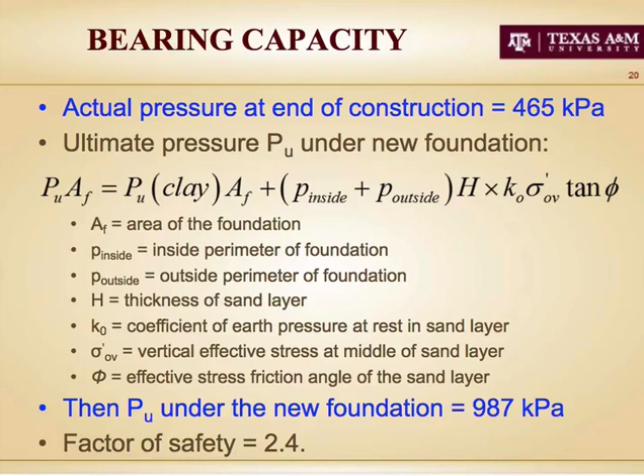If you do the calculations of ultimate bearing capacity in this case, you have the two components due to the clay, and then I included the friction on the side of the underpinning zone, and you get to bottom right, 987 kPa. So now the bearing capacity is no longer an issue, and Casey can continue to finish the Washington Monument.

The second part of the design will be the settlement analysis.

And of course, none of this is known in 1850 when geotechnical engineering is barely starting, with some of the early work in France, for example, and in England. But Terzaghi is not even born.

So back to the calculations of settlement, there are really two definitions for the depth of influence. One is based on the stress increase, and the other one is based on the settlement increase at depth. So depth at which the pressure has decreased to 10% of the applied surface pressure, that's typically what we use. That's what you find in most textbooks.

But you can also define it as a depth at which the settlement is 10% of the settlement at the surface or less. And there is a big difference between those two definitions. It turns out that the zone of influence for your settlement calculation depends on which definition is used and also on the modulus profile.

Here is an example of, so I'm looking here at a spread footing at the top of the slide. That is a strip footing, so infinitely long. And typically in this case, we will take a zone of influence equal to 4 times the width of the footing.

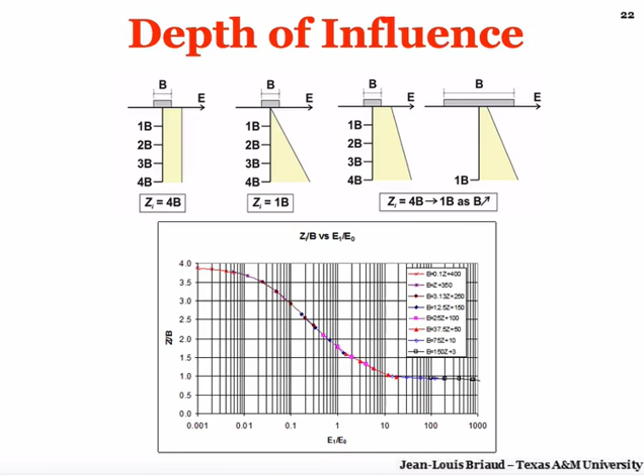If you take the definition based on the settlement being 10%, the depth at which the settlement has decreased to 10% of the top settlement, and you get to the second yellow area here, the triangular area, where it shows that the modulus is increasing linearly with depth, then it turns out that the depth of influence is 1B, not 4B. It would be 4B according to the stress increase, but it's only 1B according to the settlement increase definition. So it makes a difference.

But nevertheless, in this case, there's not a big problem with the zone of influence because the footing, the mat is about 38, say 40 meters wide, and the bedrock is only 20 meters deep. So we're limited by the presence of the bedrock.

Once you have the depth of influence, you need to find the increase in stress at depth. And we ran the finite element method with Abaqus. And we got the increase of stress with depth on the left-hand side under the phase 1 foundation.

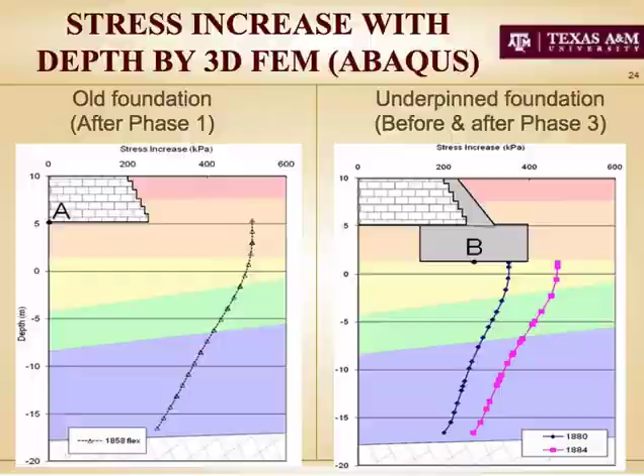And then we reran that finite element simulation for the case of the underpinning, and you see the pink profile on the right-hand side. So now we had the zone of influence, we had the stress increase with depth, and we relied mostly on the consolidation tests that had been collected over time.

So we used the consolidation curves that we had and did some calculations of settlement under phase 1, phase 2, and phase 3. And you see the cases here under phase 1, that's the old foundation with the limited amount of area and a fairly large weight, and we get 1.328. These A, B, C are different cases of level of the water table, but overall about 1.4 meter. So 1.4 meter is approaching 5 feet of settlement. So that structure really went down during that first phase.

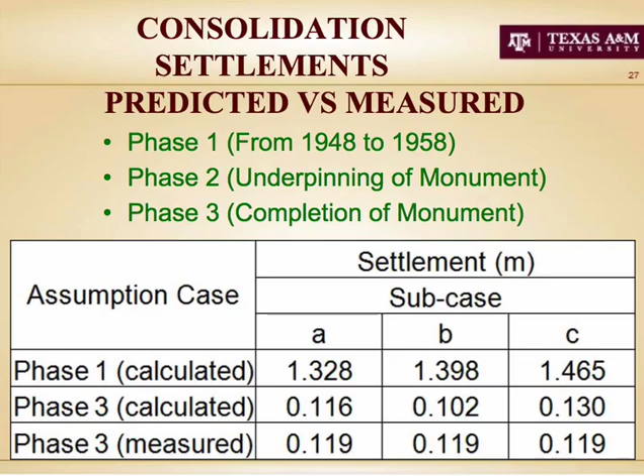And then after the underpinning, the additional settlement using the consolidation curve limited to about 4 or 5 inches or so, 0.116, and the measured settlement 0.119. I must admit that I was surprised by how close the predictions were to the measurements. This is rather unusual in geotechnical engineering, but that was the case in this particular case.

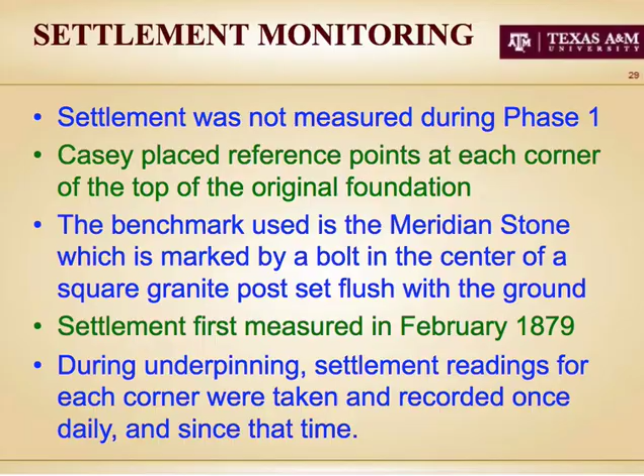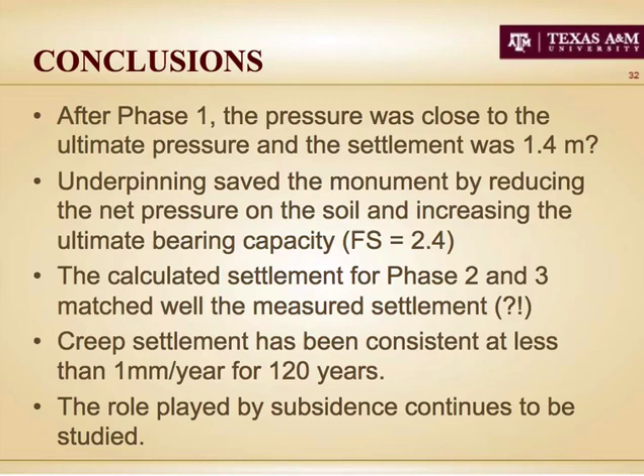So in conclusion of this first part, after phase 1, the pressure was close to the ultimate pressure, and the settlement was about 1.4 meter. So it was close to being a very, very big problem. Fortunately, it went down very straight, and every time I go to Washington, I look at the monument to see if it's leaning one way or another, and I cannot detect any leaning. So fortunately, it went down straight. The underpinning saved the monument by reducing the net pressure on the soil and increasing the ultimate bearing capacity. Calculated settlement, phase 2, phase 3 match well the measured settlement, a bit of a surprise to some extent. Creep settlement, 1 millimeter per year for 120 years. And the role played by subsidence in the Washington Monument continues to be studied.

For those settlement calculations, we actually read the consolidation curve directly. We did not reconstruct, through the Casagrande construction and things like this. We did not use the reloading part. We simply used the virgin curve, if you wish, considering that basically when the sample comes to the laboratory and you extrude it, the first thing that happens is a recompression of the sample. So the first part of the virgin part of the consolidation test is actually a recompression of the sample.

So that's my suggestion, that you plot the consolidation curves as a stress strain curve, just to get a sense of where the influence of the steel ring starts to be excessive. And then beware of the unload-reload loop. I personally don't like unload-reload loops. They can tell you whatever you want. If you want a high modulus, you don't unload much. If you want a low modulus, you unload a lot. And so the extent of the unload really changes the value significantly.

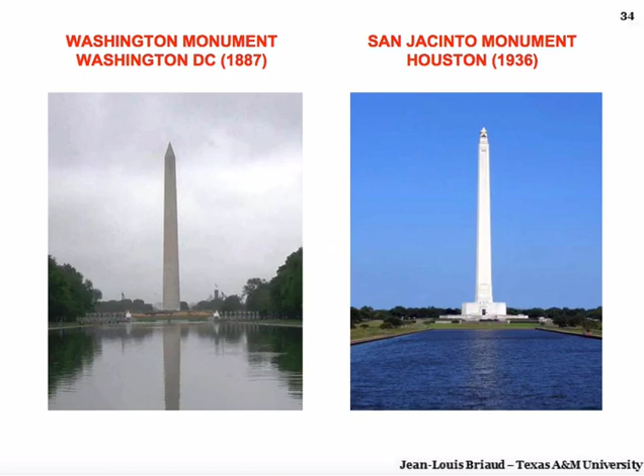I'm going to take another few minutes to tell you in a few slides, maybe 5 slides, about a parallel monument built in 1936 in Houston, the San Jacinto Monument, to celebrate the 100-year anniversary of the victory of Sam Houston over Santa Anna at the San Jacinto River. The monument was built in 1936. Ray Dawson, a professor at the University of Texas, was in charge of the foundation design, and he was a very smart fellow and decided to monitor the settlement. So we have settlement of this structure ever since 1936, all the way to, in this case, 2006 was the latest measurement.

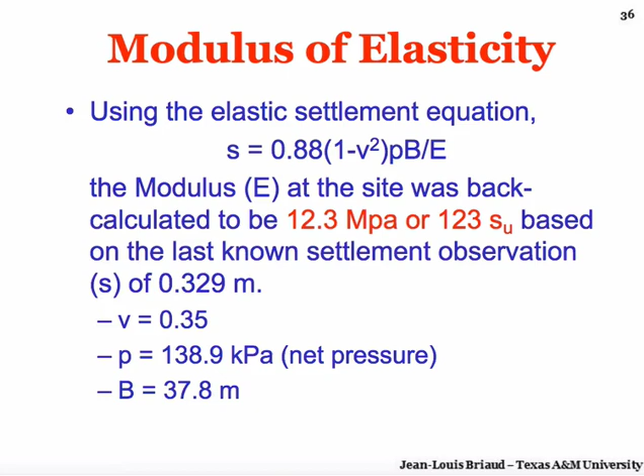We've published several papers on this monument. One interesting factor is that at the monument we were able to get the undrained shear strength, and because the settlement was measured, we could back-calculate the elastic modulus that would give the right answer. It turned out the modulus, shown in red on the slide, is of the order of 120 times the undrained shear strength. Note that the settlement of the San Jacinto Monument is about a foot, so today these structures are not designed for that much settlement.

A note here on the modulus of subgrade reaction: I would urge you not to use it. It's a flawed parameter because it depends not only on the soil but on the size of the foundation. K equals P over S. If you use the elasticity equation, you get a K value that is a coefficient I times the modulus divided by the width of the foundation. So K depends on both the soil parameter and the size of the foundation. If K is 20,000 kilonewtons per cubic meter for a 1 meter footing, back-calculated from a plate test, then K should only be 2,000 for a 10 meter footing. Using the same K for the 1 meter and 10 meter footing leads to serious surprises.

One issue we addressed: Houston has gone down about 10 feet over the last 100 years because of pumping. This is the record of a well near the monument. In 1936, the water level was 5 meters deep; in 1976, it was 90 meters deep. Houston then decided to stop this because it was creating problems, and started getting water from a nearby lake rather than pumping from underground. The water level has gone back up significantly since then.

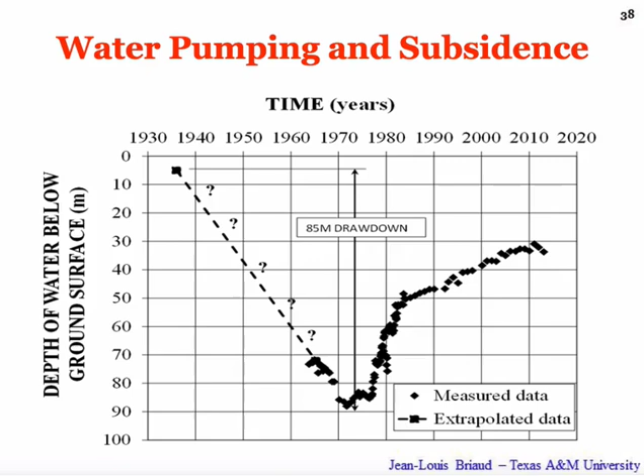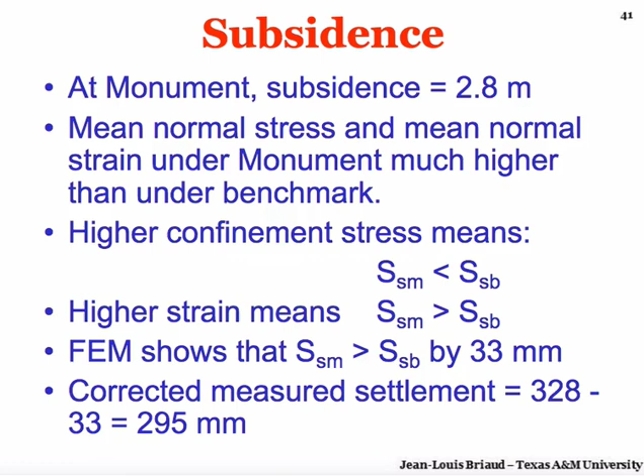So there is a balance, and we studied that by finite element method. Long story short, there is a difference of about 33 millimeters between the benchmark and the monument. So the recorded settlement is 328 millimeters, but should be corrected for this subsidence influence to about 295 millimeters.

This is my last slide, and I'll finish with a question you don't have to answer, but maybe you can think about it. Two tall structures settled significantly, the Washington Monument and the San Jacinto Monument—one settled 4.6 feet, the other 1 foot. Both performed very well over time. Modern tall structures typically settle a lot less. What is the allowable settlement of tall buildings? I don't think we have a good answer for this.